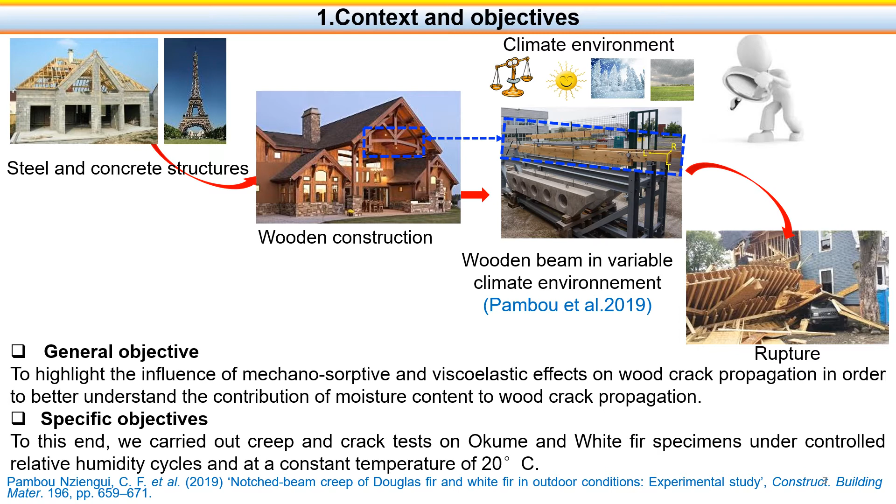Before the creep test, we carry out static 3-point bending tests on the notched beams of Okume and white fir until rupture. The test is done in two steps. The first step consists in applying successive masses on the tested specimen. The second step consists in adding water in the container that we had previously attached to the beams. The filling of this container was done via a pipe connected to a water tap.

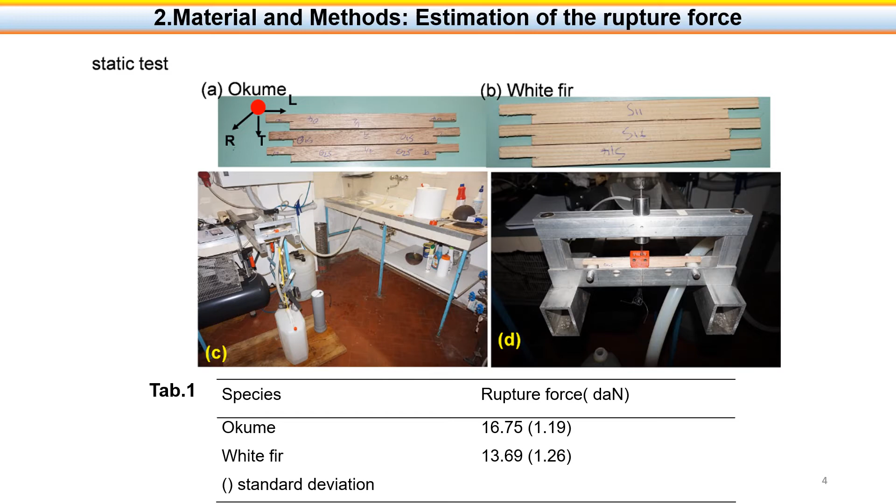At the rupture of the beam, we stopped the water tap and read the mass at rupture with a balance. Table 1 shows the average value and standard deviation of the rupture force. After determining the force to be applied, we perform viscoelastic and mechanosorptive creep tests in 3-point bending. Figure A shows the geometry of the beam tested.

Each beam is equipped with 3 transducers, 2 at the sides and 1 at the center. The side transducers, TL and TR, are used to estimate the swelling and shrinkage and to correct the deflection at the center. The central transducer, TC, is used to estimate the displacement in the center of the beam. At the two ends of the beams, A and B, we made notches of length LR of 20 mm and height HR of 6 mm.

We also initiated a crack length A0 of 4 mm and crack opening OC of 0.3 mm with a cutter blade to facilitate crack propagation. Each face of the beam is graded in millimeters and marked by two vertical lines, D5, D6, and D1, D2. These two lines allow to calibrate horizontally the real dimension of the image according to the magnification. The estimation of the crack opening is done by measuring the variation of the distance D1 and D2.

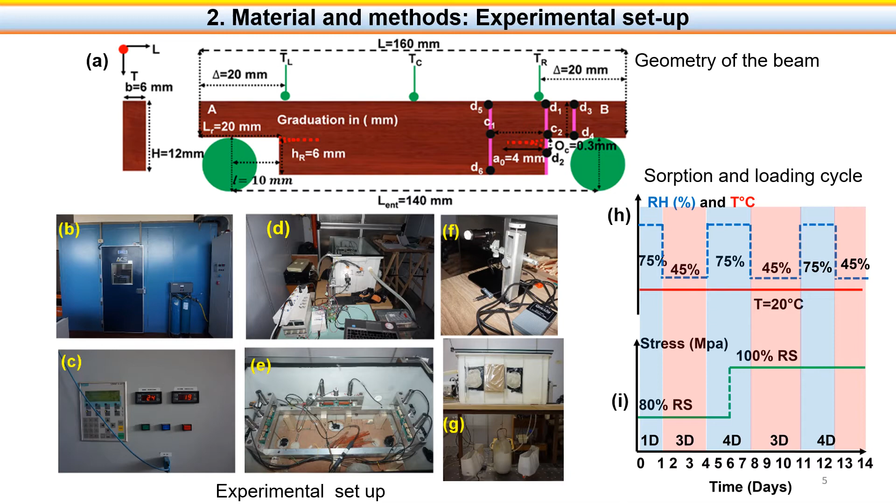The monitoring of crack parameters was done with a USB microscope. The microscope automatically records the image number, the date, the time, the image size and the magnification. The microscope is set by default in the no calibration mode, and this mode is not very accurate and does not describe the real dimension of the image.

This operation is done in 4 steps. The first one consists in taking an image with the microscope on which we have 2 reference points of known distance. In our case, we took an example with a ruler. When estimating the distance of this image, we notice that the distance reading is wrong because the real dimension of this image has not yet been calibrated.

By calibrating this image with the magnification 25.9 and a known real distance of the image of 10 millimeters, we get a less erroneous reading of the measured distance. On the final image, we can see the measured distance is not the same as the known distance. The error is of the order of 0.09% and is negligible, which can be justified by the difference in precision of our measuring tools, in particular the graduated ruler.

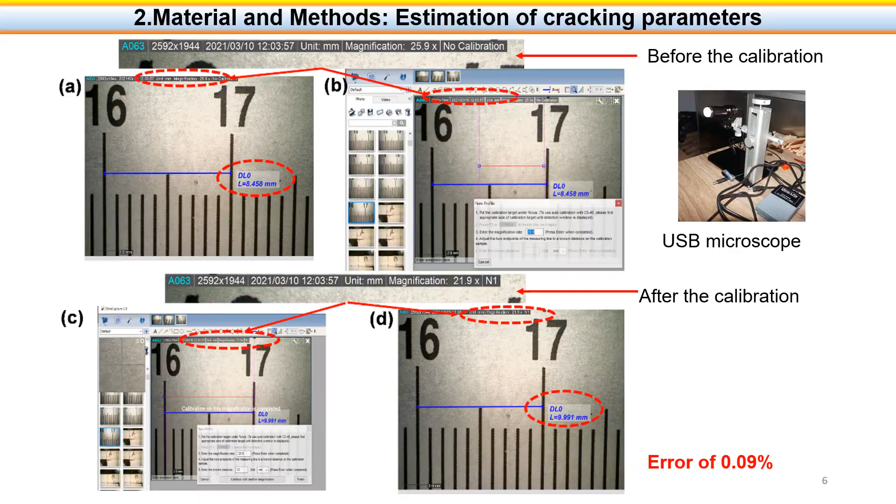We present the strain due to the mechanosorptive and viscoelastic behavior effect on the crack propagation of the test beams until the rupture of test one, and the evolution of moisture content. From this curve, we can see that the instantaneous strain of Okume is greater than that of white fir. We zoom in on figure E of white fir test 1. During the instantaneous loading, we better see the timing of the loading as shown by the circled area P1.

The crack propagation tends to develop on one side of the beam while it remains almost constant on the opposite side. This is the case in Fig A and Fig C. After loading, the wood shows a viscoelastic behavior. During this phase, the crack increment remains almost constant, but after the first drying, the wood shows a mechanosorptive behavior, and the crack increment tends to increase until the rupture of the beam. In the white fir test, the rupture occurred during the drying phase, while in the Okume test it occurred during the wetting phase.

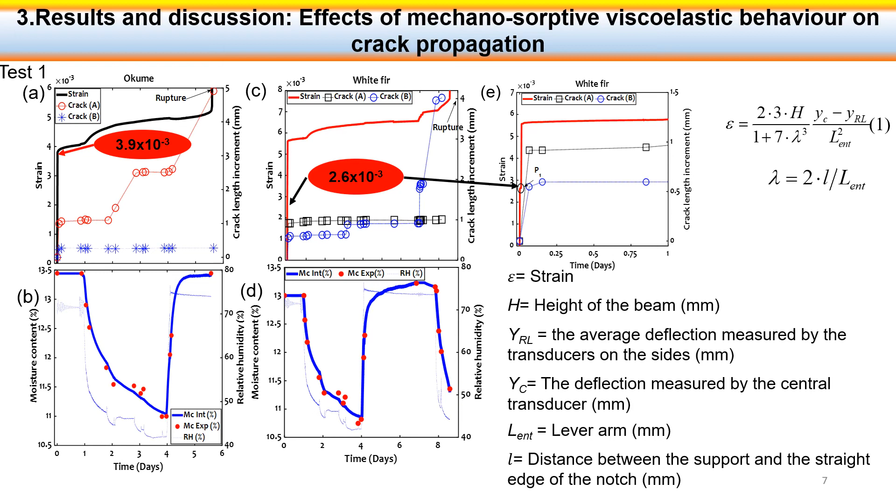During the second humidification on day 4, two types of phenomena are observed, mainly pseudo creep and pseudo recovery. These phenomena are explained by moisture expansion. The same observation can be seen in this slide. This represents the effect of the sorption cycle on the crack propagation. This figure shows the behavior of the crack opening under the effect of variation of the experimental moisture content of the two faces A and B of the Okume and white fir specimens for test 1 and test 2.

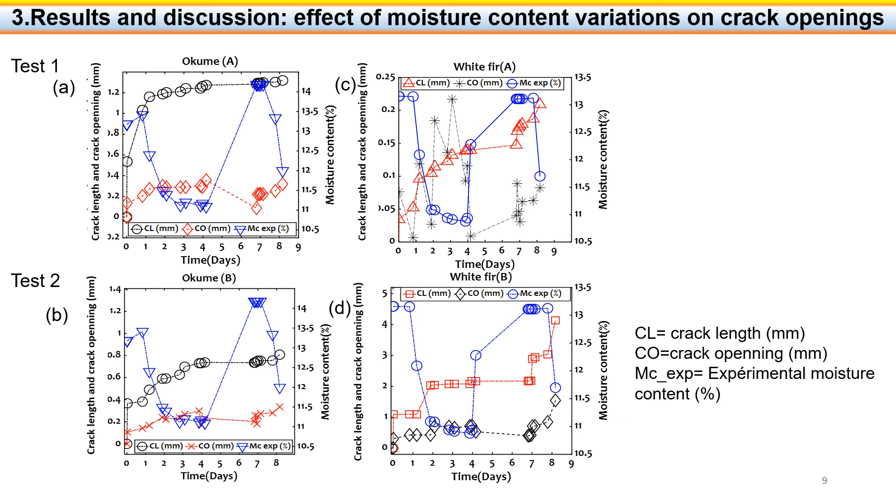The crack opening increases during the drying phase. However, it remains constant or closes during the wetting phase. The increase in crack opening during the humidification phase on day 7 is explained by the additional loading.

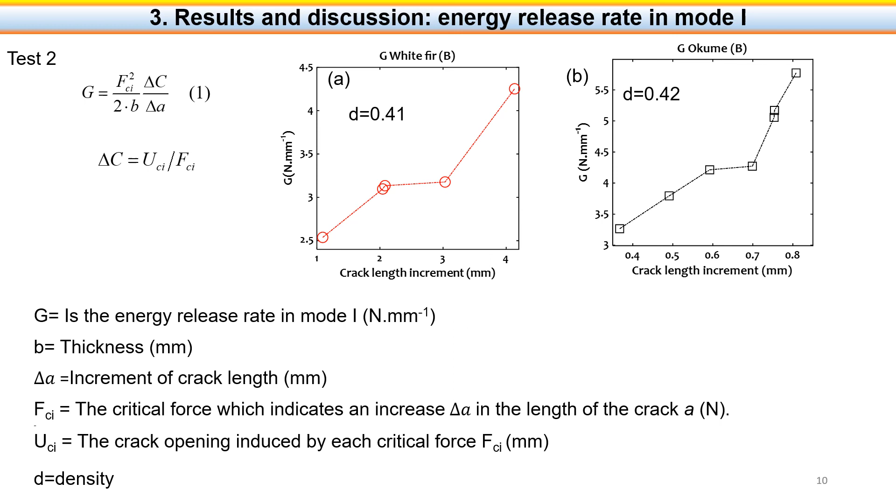This figure shows the evolution of the energy restitution rate with the crack increment for the species. The amount of initial energy required for crack propagation in Okume is slightly higher than that of white fir. This can be justified by the density of the two specimens tested, which are 0.42 for the Okume and 0.41 for the white fir. This seems to confirm the observation of Odunga and Hall on the effect of the density on the rate of energy restitution, where we note that the energy restitution rate of the dense species was higher than that of less dense species.

In conclusion, we can see that crack propagation is accentuated by the drying effect and the applied stress. Crack propagation is influenced by visco and mechanosorptive effects. The crack propagation is greater when mechanosorptive effects occur, especially during the drying phase. The crack opening increases during the drying phase. Crack opening remains constant or closes during humidification. In the future, we would like to carry out further tests with long sorption cycles and apply the same strain rate to all specimens for a good stabilization of the moisture content in wood.